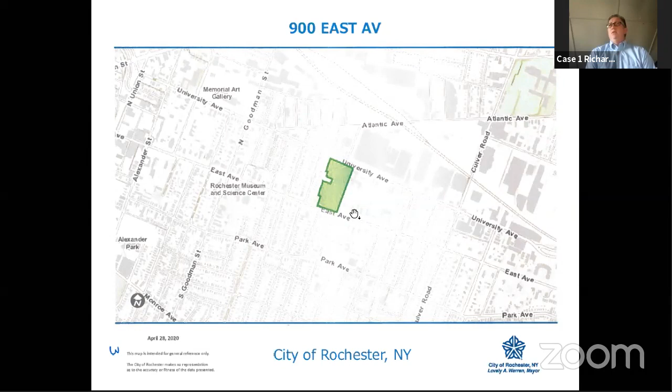It's a fluid dynamic, of course. We established this before our quarantine environment and trying to work around the museum's schedules. But we're optimistic that a phased approach will continue.

Ideally, the storm windows will be produced so they can be installed as temporary windows when the prime sash is removed for repair.

And that is my presentation. I believe we also have Kathy Connor and Tim Forster from Rochester Colonial on the Zoom line with us in case there is a more direct question that one of the two of them can answer.

Okay, well, thank you very much, Mr. Osgood. This is an impressive presentation, at least I think so. Chris, before we move to questions, let me just note that all board members have visited the site. We polled folks in the pre-meeting, and all board members present have visited this site. Great. Okay, thank you.

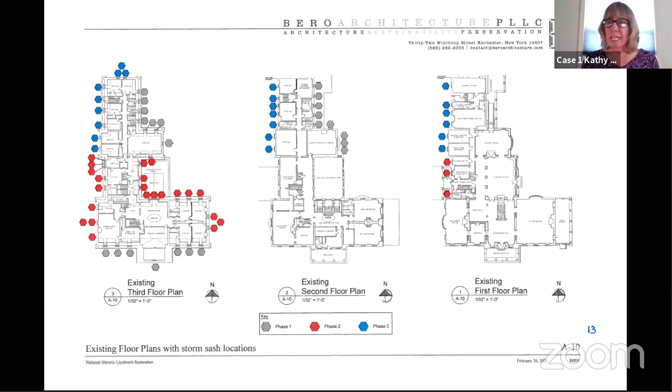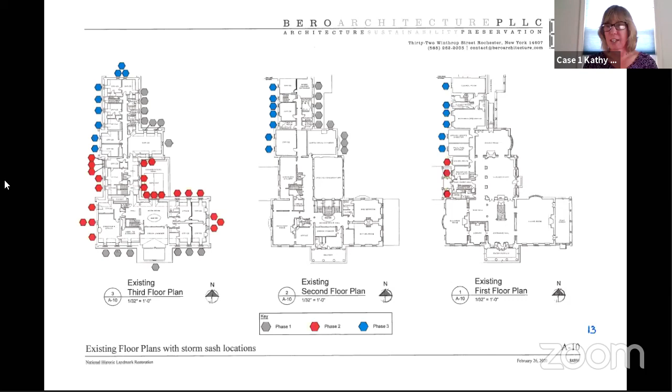So the storm windows can be removed to clean, basically, and we have had sometimes a couple bees get in there, so we have to remove them even more than we'd like during the year just to remove the bees' nest. But basically, they can be removed to be cleaned, but we tend to not remove them at all in the rooms that are exhibits or historic house rooms because we don't have the need for circulation. We have air conditioning and heat. Okay, thank you. That was my only question.

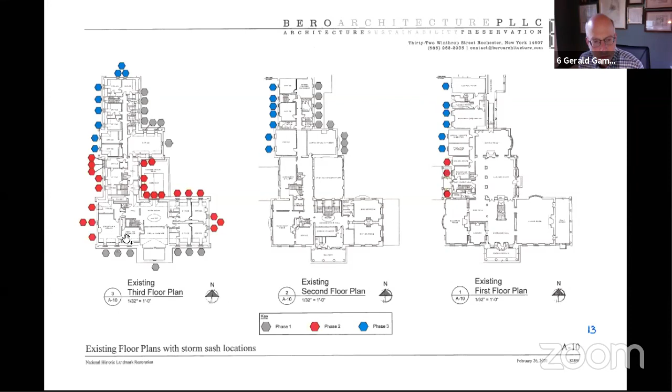Okay. Moving on, next alphabetically is Gerald Gam. Gerald, do you have any questions about 900 East Avenue for the applicant? I do. I have two questions. So Kathy, my first question is for you. What hardware is being used to affix the storm windows? Are they being screwed into the house, as I think some of the first floor storm windows are, or will they be clipped on the way they are on historic houses typically in this neighborhood?

Well, I can answer part of that, and I think the person from Rochester Colonial should answer the other part. The original ones, we have a special secret lock. You use a screwdriver, so to speak, to push it in, unlock it, and then because of the weight of the windows, there's a latch at the top you pull down and then out to be able to get it out. I don't know about the new ones, especially the fancier windows, so I think they should address that question. Okay, thank you, I think it's Tim that's on the line with us. Tim Forrester, are you there?

I am here, yes. Hi, Tim. Let me swear you in, please. Tim Forrester, do you solemnly affirm that the testimony you're about to give in this hearing is the truth, the whole truth, and nothing but the truth? Yes, I do. Thank you, sir.

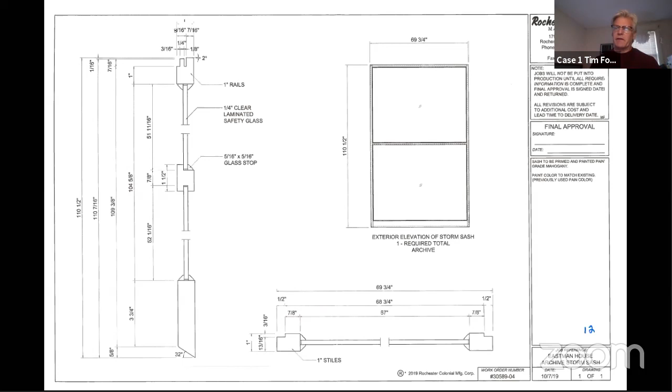Richard, I may need your help on this, but I'm fairly certain that at the top of the storm window there's a notch that slides into a setting block, and there are cam fasteners at the bottom. Those are brass fasteners that, as Kathy indicated, are turned with a screwdriver, and a simple cam inserts into the side jamb. It's a very clean and elegant fastening. Richard, is that your understanding as well? It is, Tim, exactly. Okay, thank you both for that.

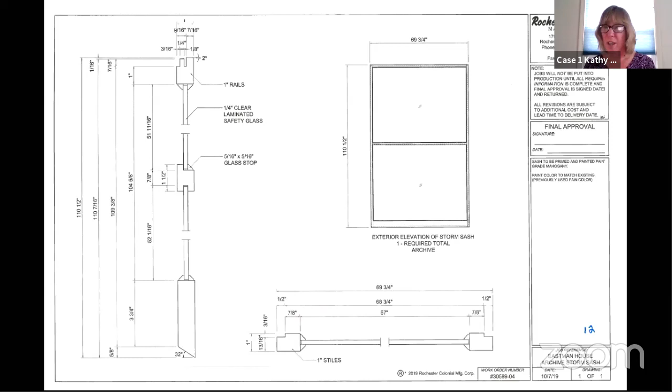And my only other question, Richard, you mentioned the color of the storm windows, and I missed what you said. Are they being painted to match the windows themselves? The storms are being painted to match the storms that were put on in the early 2000s, so they are slightly different than the prime sash. Why would the storm windows be a different color from the main sash? When we came before the Preservation Board the first time in 2000, they felt because the storms weren't original to Eastman's time, they should be differentiated in some way. So we used all the authentic colors for the rest of the window, but made the storm window a blended, muted off-white to show that they were different.

Okay, thank you. I guess we can't overrule the old Preservation Board. So the new storm windows will be the same slightly whitish color. That's correct, that the old storm windows are. Okay, thank you very much.

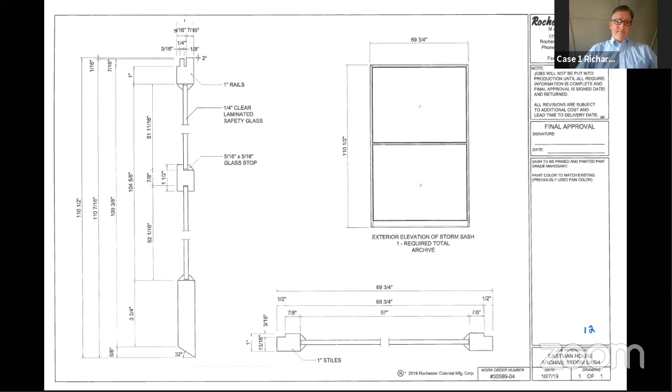Dave Matthews, you're next. Do you have any questions? I do not have any additional questions. Thank you. All right.

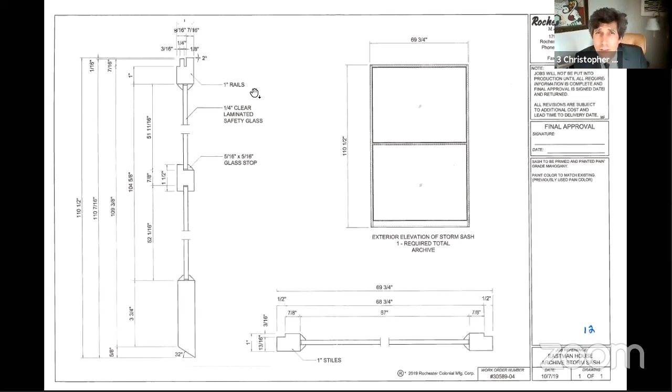Now I'm going to read a public testimony statement for any public testimony received after April 28th, 2020. This is the public testimony for 900 East Avenue, case A-057-19-20, for the May 6th, 2020 hearing of the Rochester Preservation Board. All written comments were due May 5th, 2020 at 5 p.m. for inclusion into the public record. All written comments received after April 28th, 2020 will now be read into the record. All other written comments can be found in the staff report. Please note that all comments were provided to the board in advance of this hearing. There are no additional comments or comments within the staff report for this case.

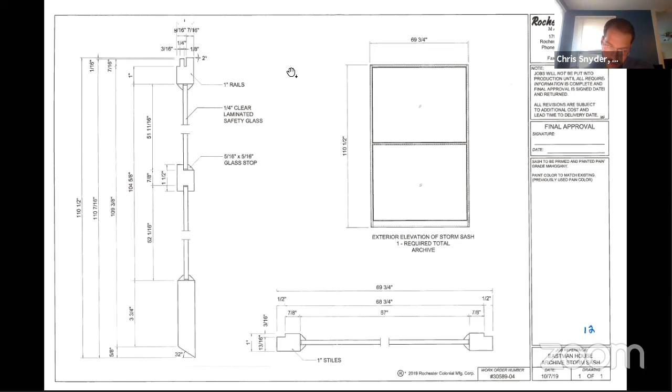So now we are going to move into deliberations for this case, and I will read the deliberation statement. Thank you so much for joining us. This is the deliberation for 900 East Avenue, case A-057-19-20, for the May 6, 2020 hearing of the Rochester Preservation Board. During deliberations, board members review cases and take action by voting. There is no participation by applicants or the public.

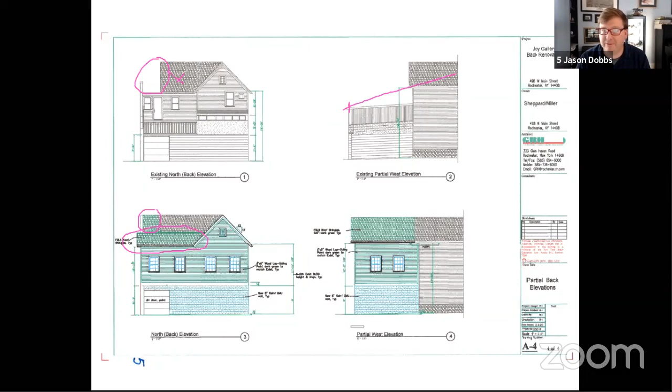So I'm excited to see what comes back next month. So thank you very much. Thank you, Jason. Next would be Gerald Gam.

Questions, Gerald? Yes, so Jason understands the block wall on the first floor. I just wanted to hear a little bit more about the logic for the block wall rather than bringing the siding all the way to the ground. That's my first question. Can you just say a little bit more about that decision?

That alley, Clark Alley, is narrow, maybe not even 15 feet. And that wall has been hit three times, at least from what I can see, there are three places that are cracked quite a bit. Some places they patched them. So now if I bring the siding down, they're going to keep hitting it.

To be honest, I was thinking I could have put brick on that, because if you go toward the west side of the alley, there's a nice, very beautiful brick building with a mansard roof, and I really like that building. What I could do is basically on the face provide brick, and if you look at the side of this building, they're all brick. So I can put a brick veneer with block backup, because I need that just in case another car hits that wall, then at least the structure won't come down.

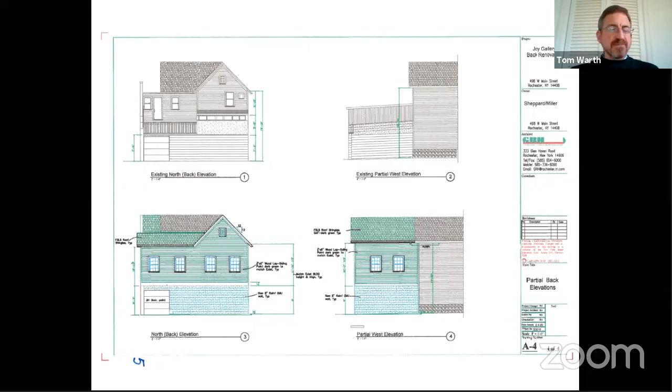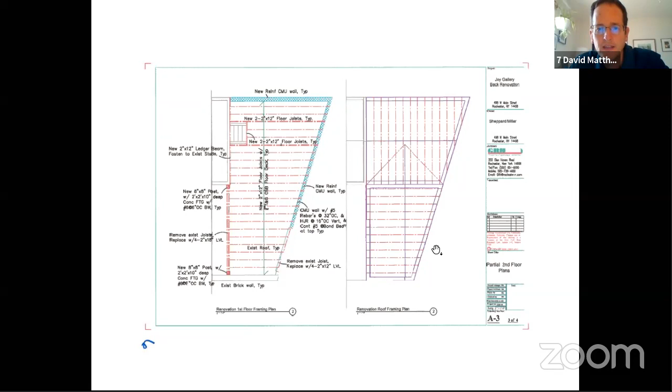I just want to build on what Jason was looking at with the roof to the left. Reza, what is drawn here almost looks like a flat elevation that's kind of a square box. But looking at your roof framing plan and where the ridge of the small roof is, down at the bottom on the right side, there's very little that comes off the ridge and slopes down to the alley.

So Chris, if you can go back to the elevation drawing again. It seems to me that what you're proposing is looking like that. Can everybody see that, the white line I drew on there? Cannot. There's a red one, does that show up? Yep, okay. So that's what it looks like the roof framing plan is showing us.

And it's not a horizontal gutter situation on that roof. So I think we just need more information, maybe a roof plan, and like Jason said, an elevation from the east, because that changes the look back there quite a bit. It's a little deceiving what's shown on the north elevation, almost looking like a rectangular box, where this has an angled wall to that elevation. So I think we need more information on that. I understand, so that was just a comment on that one.

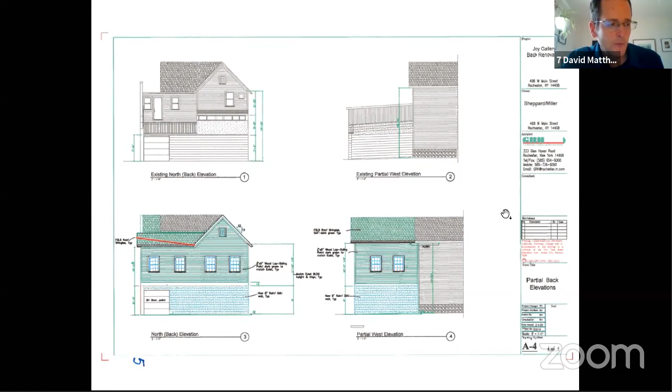And I want to go back to the divided light issue. You're in a historic district, and historically the windows would have been true divided light. So under your options for the Andersen 400 series, at least in our packets, there were a number of options, and I think we'd want the full divided light to match more of what would have looked like in the historic nature. So one of the top three, rather than what you were saying, which was not going to be true divided or full divided light.

I know it's not true divided light, it's not single individual panels, but trying to get as close to the historic nature of what would have been there originally would be in line with the full divided light. So that would just be my suggestion, to look at those details. Those were the only comments I had. Otherwise, I think it's a great improvement over what's there. You're cleaning it up, making it more habitable, and providing a place that hopefully will be a great studio for the owner. So we appreciate your work on this.

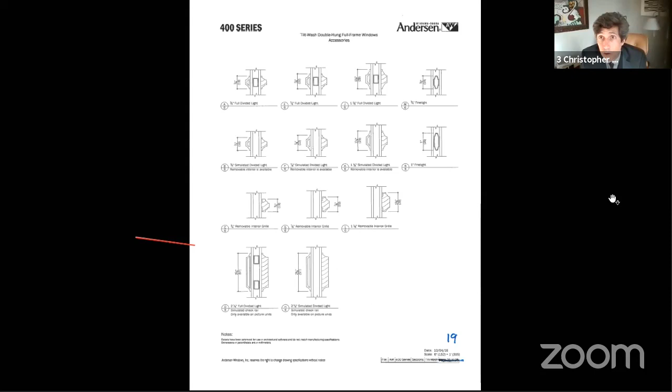Okay, thank you Chris, let's go down to the testimony. These are the pages for that. Okay, so additional public comments. This is the public testimony for 498 West Main Street, case A-060-19-20 for the May 6, 2020 hearing of the Rochester Preservation Board. All written comments were due May 5th, 2020 at 5 p.m. for inclusion in the public record. All written comments received after April 28th, 2020 will now be read into the record. All other written comments can be found in the staff report. Please note that all comments were provided to the board in advance of the hearing. So now I will read these into the public record. There were several comments that came in after the April 28th deadline.

April 30th, Bleu Cease from the Rochester Contemporary Art Center writes: I write today in support of Luvon Sheppard's planned improvements to his facility on West Main Street. The gallery and studio are important assets for the local art community and active in advancing the West Main Street Susan B. Anthony neighborhood. He's already made significant improvements to the building, and I look forward to seeing these efforts continue. Please feel free to contact me with any questions. Bleu Cease, Executive Director, Rochester Contemporary Art Center.

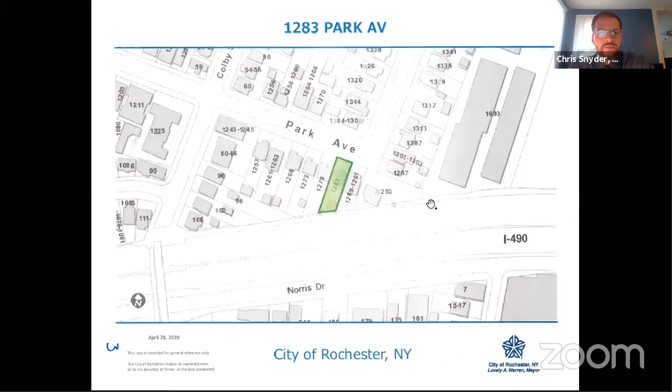So there were no... I'm sorry, I'm a little lost here, give me just one second. Yeah, there were no additional comments as part of this case other than what was presented in the application package.

So now I am going to move to the deliberations for this case. Thank you so much for joining us. This is the deliberation for 1283 Park Avenue, case A0-01-19-20 for the May 6, 2020 hearing of the Rochester Preservation Board. During deliberations, board members will review cases and take action by voting. There is no participation by applicants or the public.

Okay, thank you very much, Mr. Snyder. Board members, we will discuss and vote. We'll do this alphabetically. We'll start with Deborah Beardsley. Deborah, what are your thoughts on this case? I feel this is a high quality application. It's very detailed and careful. I'm in support of it. I believe that it's appropriate for the neighborhood and for this property.

Thanks, Deborah. Ed Kane, what are your thoughts on this case? I agree, I think it has my full support, and as was mentioned, just make sure that the trim on the new window matches the trim on the old window.

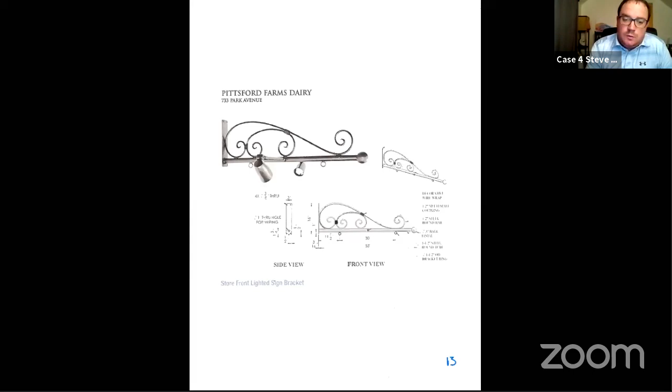With both brackets for both companies will have lights on either side to illuminate both sides of the double-sided blade sign. They will also be installed at a height underneath the kickout window of the second story, which I'm guessing is the residence. They're on the front of the building, so that will take care of the viewing angle up and down Park Avenue.

And is that at the height shown on the page? Is that depiction an accurate depiction of the height for the sign installation? Correct, the document being shown right now is to scale on the height, and we will be using that height for the installation of both signs for Pittsford Dairy and for the Chai Guy. Okay, thank you very much.

You're very welcome. May I address Deborah's concern? Please. Deborah, thank you for bringing that up about the door sign. While we didn't plan on having a sign on the front door like Pittsford Dairy Farm, we're not opposed to putting something on the door if the board wanted consistency with having something on each door. So that is an option if that's better.

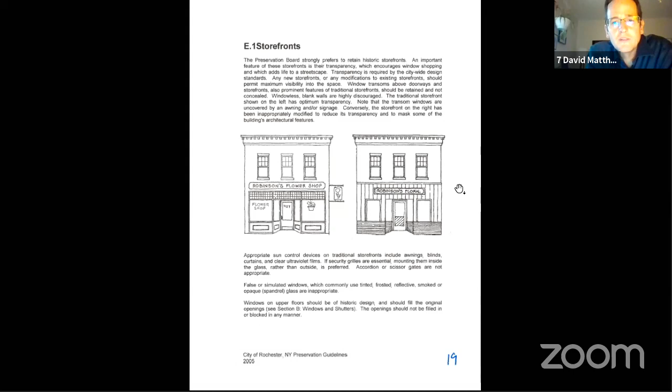David Matthews: Right, Chris, can you go back to the photo with option 1? What page is that? Page 8.

Thank you. You know what I really like about this restoration is replacing the clear anodized with the bronze. And I think if you look at the overall composition of the colors on the facade, that's going to make a huge improvement, along with replacing the tile under the windows. So I really applaud the applicant for going in that direction. I think especially with the wood door, at least on one side, and on the Chai Guy side, it would make it very rich and just a really nice composition overall for the 2 storefronts. So I'd encourage the wood door if that's in the budget and project scope. But I think it's just such a huge improvement over the clear anodized.

And budget doesn't matter, David. Well, it's their choice. It's their choice, but I think it would be a huge improvement. So I want to thank the applicant for the application, for the huge efforts to restore the building and make it really a kind of a destination on Park.